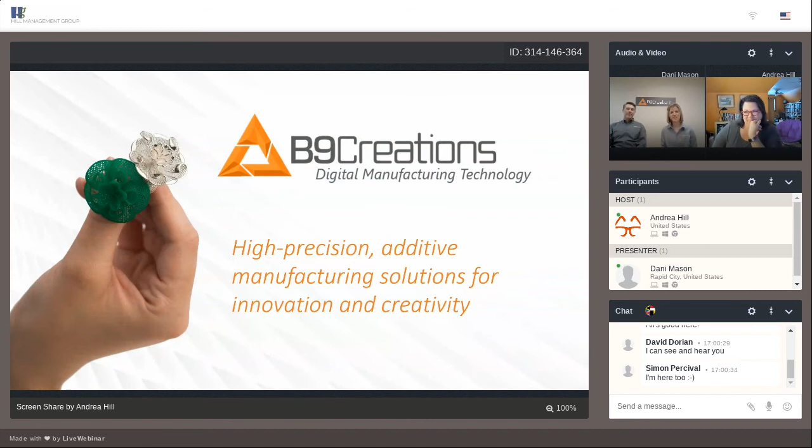So there we go. We'll keep this really short, but you heard something that's really important from both Dani and from me as we did our introductions. B9Creations is obviously not the largest company in the additive manufacturing space. We talk internally a ton about how are we going to make sure that we're serving our customers better than anyone else. And the phrase that we come back to over and over and over again is out listening the competition.

We don't have the marketing budget that some other firms have, but we do a tremendous amount of direct customer feedback. Everything from our materials to the new software platform that you're going to hear about, to the hardware. Some of that's in customer businesses, some of that's in our factory and through direct customer interactions with our engineering teams. But we really exist to improve our customers' lives with technology. And we'll talk more about what is the definition of improve and how do we do that as we go. But if you're trying to figure out, maybe you're not familiar with us, what is different or unique about our company, that's the heart of it.

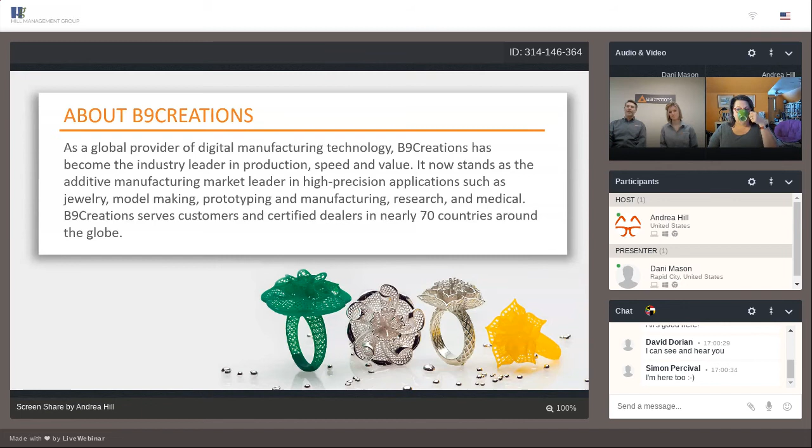So go ahead, Andrea. There's a bit of a lag here. I really am clicking when you tell me to. I believe you.

So part of what we want to discuss as jewelers adopt 3D printing technology is it's not just I have a machine in-house. There's an entire workflow that goes around their prototyping and manufacturing process, and that's where the solution needs to integrate into, both on the front end with design and on the back end to ensure that you get quality castings every time.

So I just wanted to lay out the framework, both in terms of here's what a digital manufacturing workflow looks like for jewelers, as well as where we've listened to that feedback and incorporated it directly into the products themselves. So if you look on this slide, you can see the first step is this consultation with your customers.

What we've found is that in a traditional business model, jewelers may bring a customer in, mock up a design, and then have them come back later in the week or the next week to validate that design, collect the money, and then proceed with the rest of the customer job. Additive turns that on its head.

So now when a customer comes in, say it's a fiance and they're trying to decide what their engagement ring wants to look like, you can sketch that and print an actual prototype in 12 minutes. So you're not having to send them away. You're able to use that as a same-day sales tool to be able to grow your business up front and then go back into the manufacturing process. So that's really where this begins.

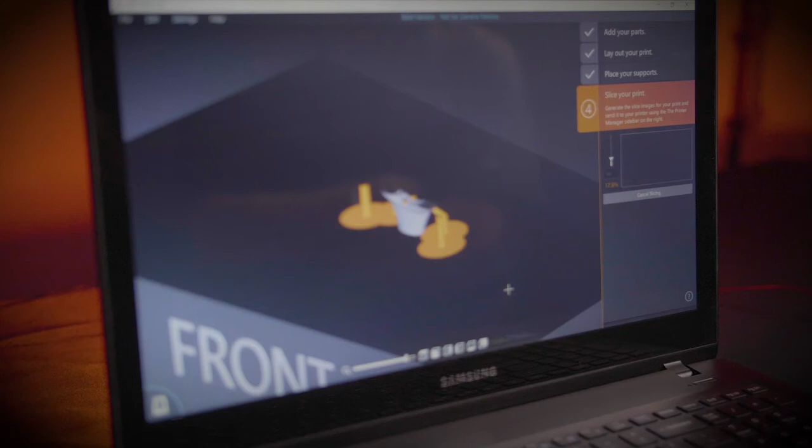surface finish, and painless post-processing. Backed by patent-pending technology that delivers pinpoint accuracy and even better surface finish, this software sets a new standard in state-of-the-art. Already in beta phase, this software will power new printers and offers an upgrade path for existing machines in the field, making them as cutting-edge as when they first came off the line. With a sleek new intuitive interface, users can leverage workflow mode that intelligently lays out, orients, and auto-supports parts in 4 easy steps, or drop into design mode to adjust a breadth of parameters to fine-tune results.

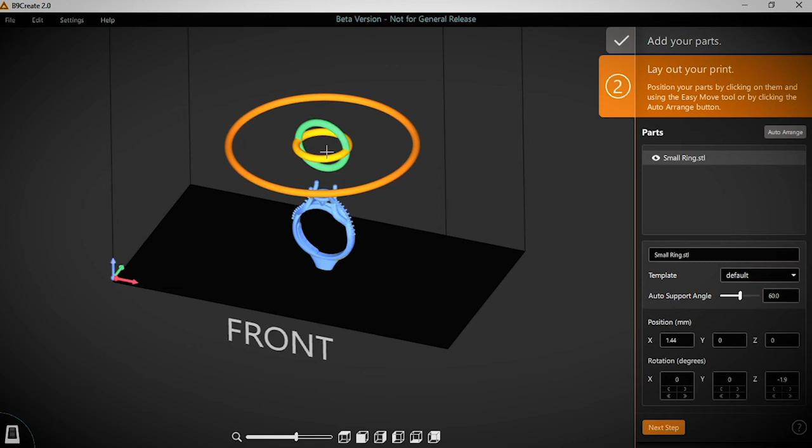Let's take a look at how to prepare your design in workflow mode. You can import, duplicate, and auto-arrange models in a grid format to maximize the print space available, or position models precisely with a movable sphere and tunable parameters. In this latest version, we're also opening up import capabilities to allow users to import and slice STLs and SLC files. Unsupported areas are now highlighted in a bright yellow, offering a visual indicator for more efficient supporting, as well as a helpful guide for jewelers new to 3D printing.

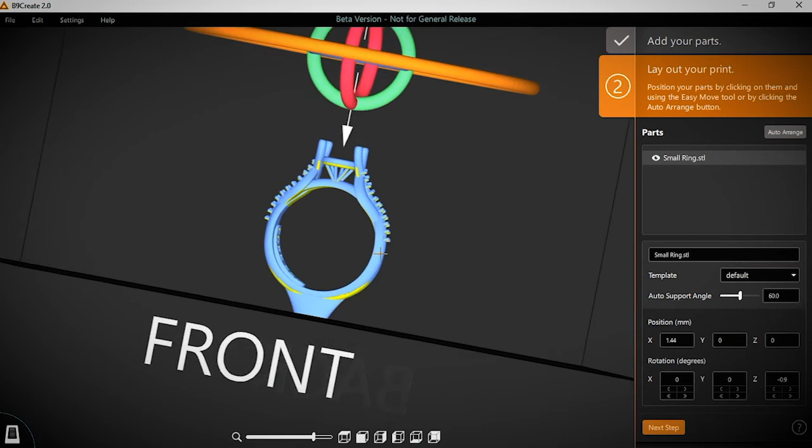Formulated with jewelers in mind, B9Create 2.0 also offers auto support templates based on the size and type of your jewelry model, from a small ring to a large bangle or pendant. In addition to offering default recommendations for a suggested support area, users also have a high level of adjustability based on your part's specific needs. New presets create custom silhouette foundations, minimizing resin usage while also allowing for user customization. You can see Cody placing supports on the model in those highlighted support areas, and now he's going to showcase one of our favorite new features.

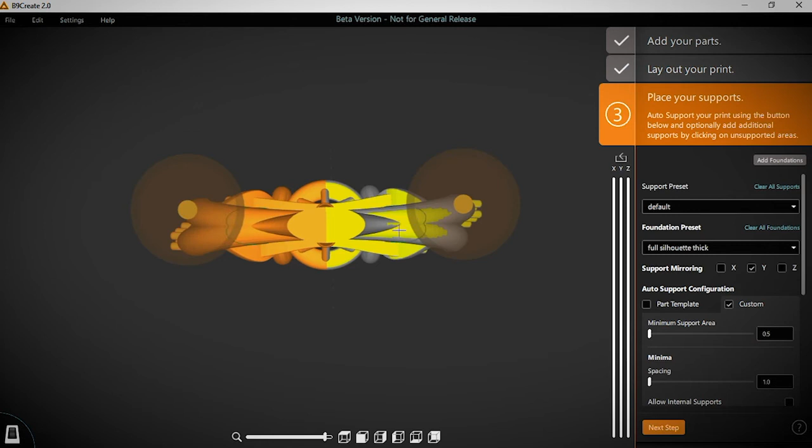Designed with feedback from real jewelers, B9Create 2.0 offers support mirroring to cut your work time in half. You can also add reinforcement bars for stronger structural supports, and lattice supports are in development as well. Plus, this support includes a sectioning tool that offers X-ray vision to enable you to view internal features of models as you're supporting.

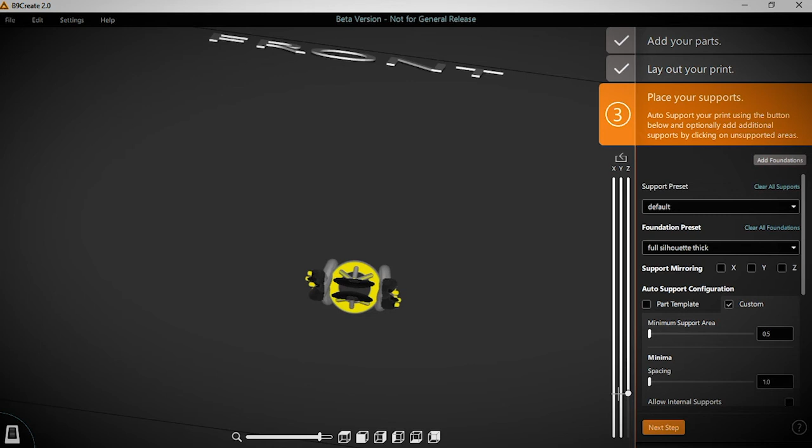Even after placing supports, you have a wide range of customizable options, from the tip to the base, and the ability to save your custom supports as a named preset for repeatable application every time. If you're leveraging auto support, you can either do so based on the templates you selected in the previous step, or use custom auto support parameters to fine-tune outcomes.

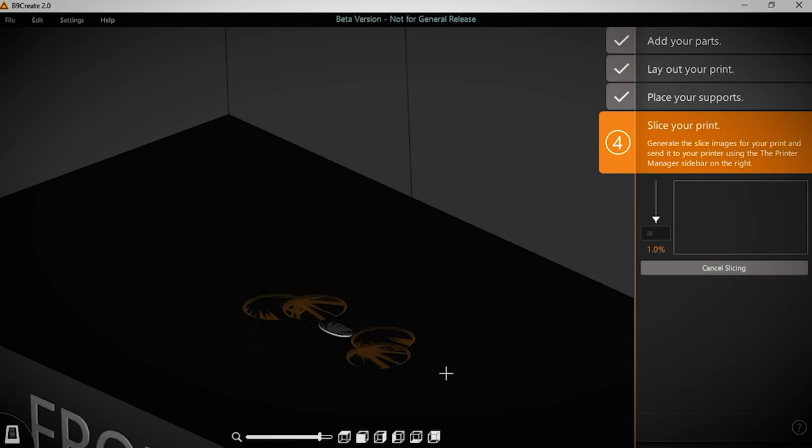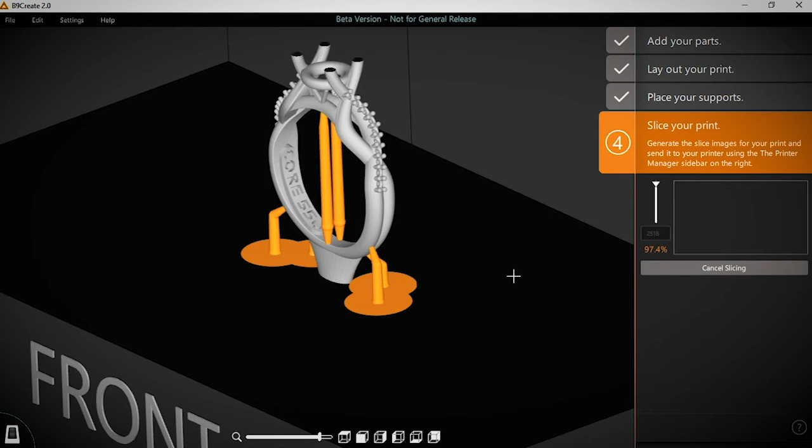After slicing, users can leverage Print Queue, an intuitive way to manage high production volume and optimize your workday, no matter how many models, machines, or team members are involved. B9Create 2.0 also offers robust reporting features with exportable data that allows you to track your print history, successes, failures, and see print volume estimates by model.

Designed specifically for scanning jewelry and small objects, the B9 Scan 350 can precisely capture each detail, cut, or facet of your most intricate designs in minutes. We understand for jewelers, time is money. The most intuitive 3D scanner for speed, accuracy, and simplicity can save you both.

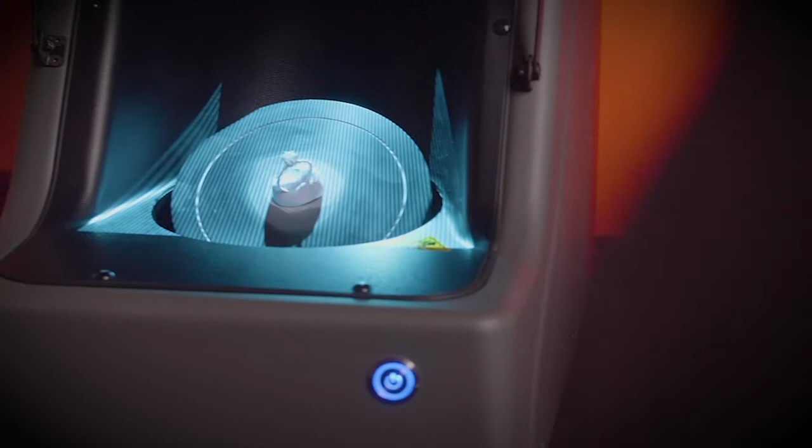The process is simple. Place your gemstone ring or other jewelry item in the machine, scan, and precisely capture each facet of the piece in minutes. With no external computer required, the scanner exports a precise replica that can either go direct to 3D printing or to your preferred CAD program for design.

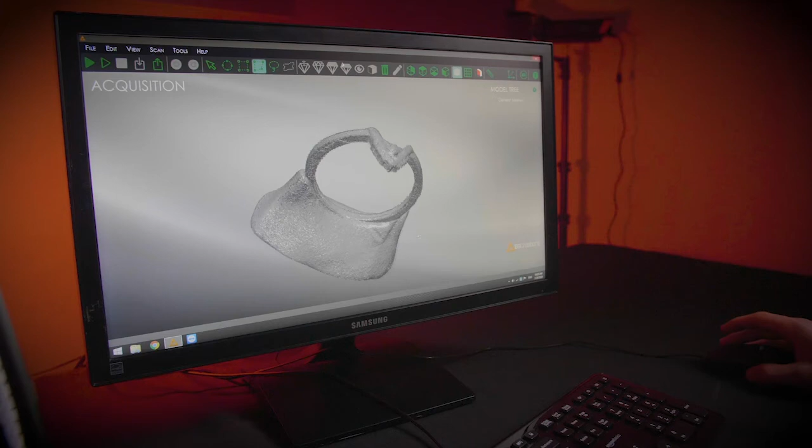Ideal for jewelers, the B9 Scan 350 allows you to scan any ring in under 5 minutes to make the perfect fitting shadow band, increasing efficiency as much as 45% while cutting down on error rate. Digitally capture and replicate heirloom jewelry or bracelet links, or complete hard-to-fabricate jewelry repairs by scanning the piece and designing the perfect fitting detail.

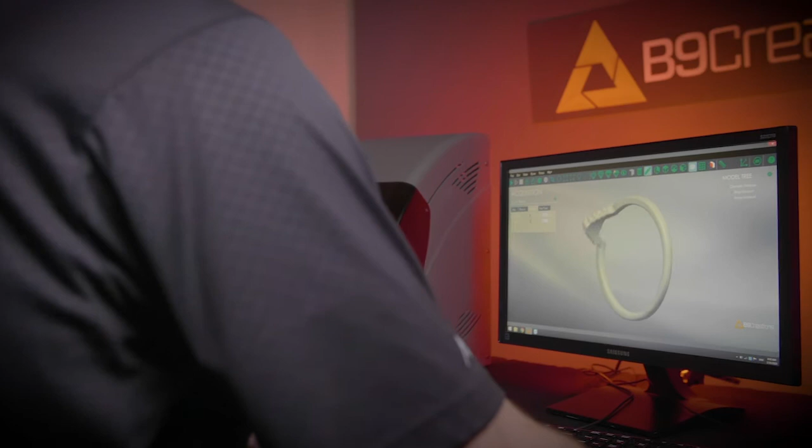For custom bezels and mountings, you can accurately scan even the most unique shaped gemstones to accommodate every angle, creating a uniform design while cutting down on design and prototyping time by 80% and ensuring a quality fit the first time. Integrate the end-to-end solution that enables your business to operate more efficiently and profitably than ever before, so you can focus less on process and more on proven results.

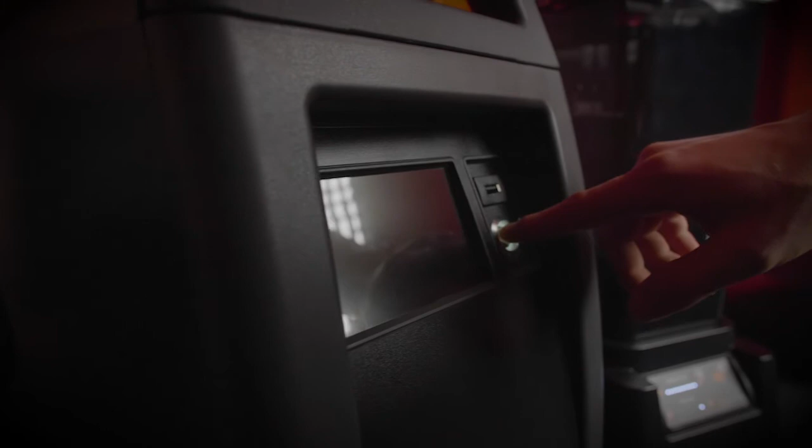Currently available in 2 configurations, 30 microns and 50 microns, with a new larger build platform with effective resolution finer than 25 microns, all our 3D printers are plug and play. Just 5 button pushes and you're printing.

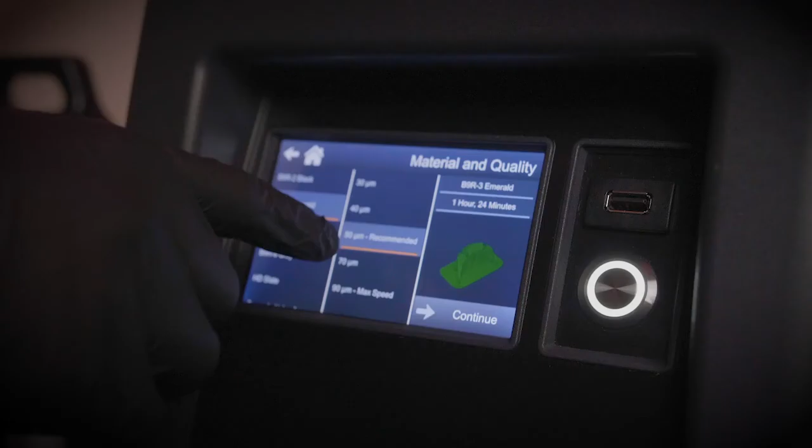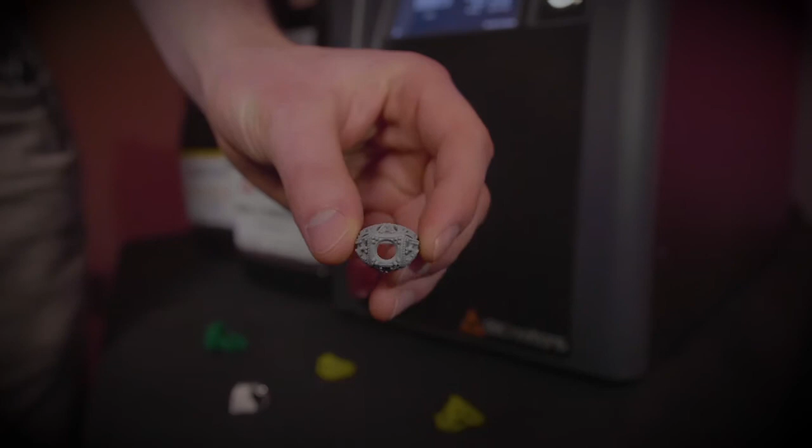After you transfer your files via USB, Wi-Fi, or Ethernet, customers can choose from a wide selection of castable and prototyping resins. Select our rapid prototyping resin for a build table of rings in 12 minutes, our high detail material to showcase delicate features such as fine filigree or pave, or our 2 castable resins for a clean burnout and repeatably flawless castings every time. Pour the resin into our patented DuraVat, which never clouds or wears.

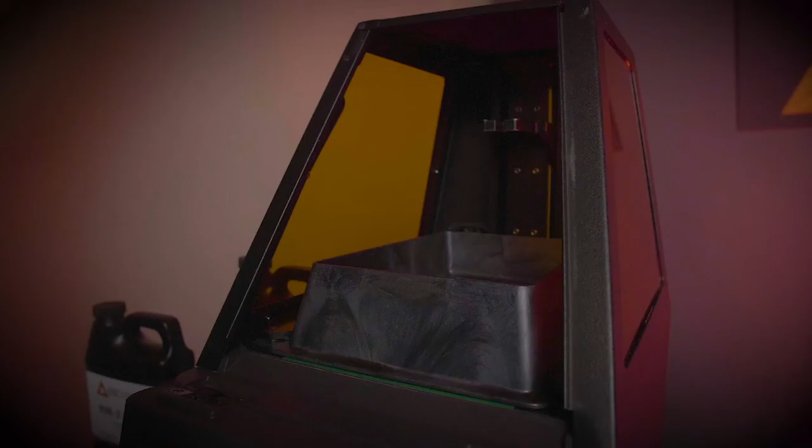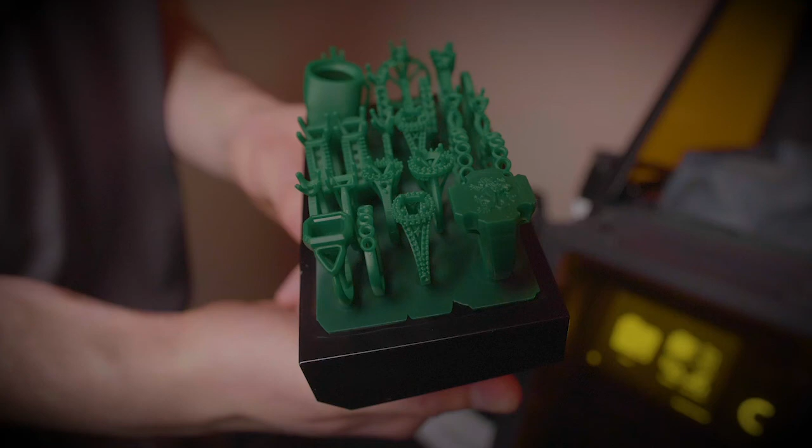Place the build table in the machine, then simply select your part in the print library, your resin of choice, and your slice thickness to optimize for resolution or speed. Hit print and watch your design come to life, with speeds that deliver a build table full of castable rings in 45 minutes. We know when it comes to custom jewelry, speed of delivery is paramount.

Whether it's the holiday season with a slate of rush jobs, or securing the sale up front with a physical prototype customers fall in love with on the spot, and a design you can cast that same day. All of our printers come with world-class factory startup assistance and lifetime support, free of service contracts or maintenance fees.

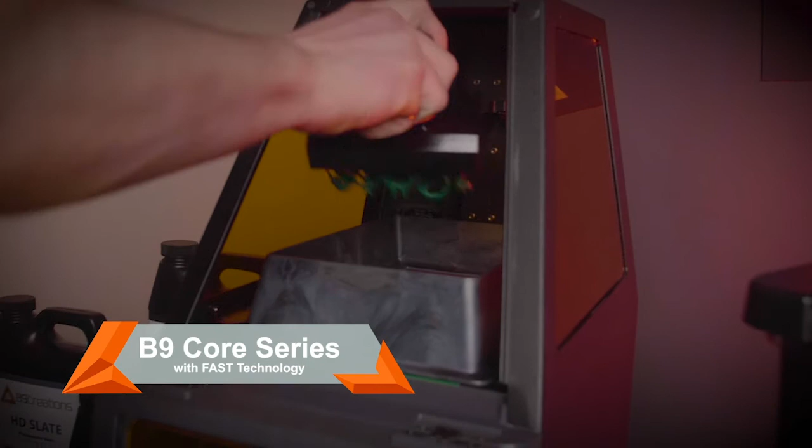So what does B9Create 2.0 software do for our Core Series 3D printers? In short, transform them. To understand how our patent-pending software technology makes our printers as state-of-the-art as when we first launched, it helps to understand how resolution, accuracy, precision, and surface finish come into play.

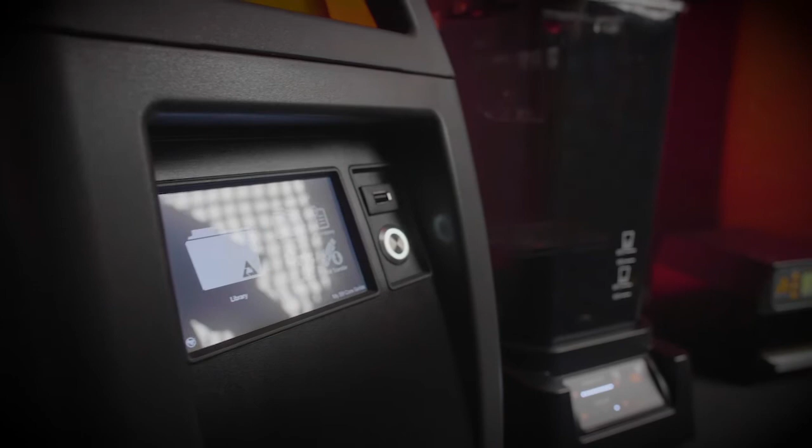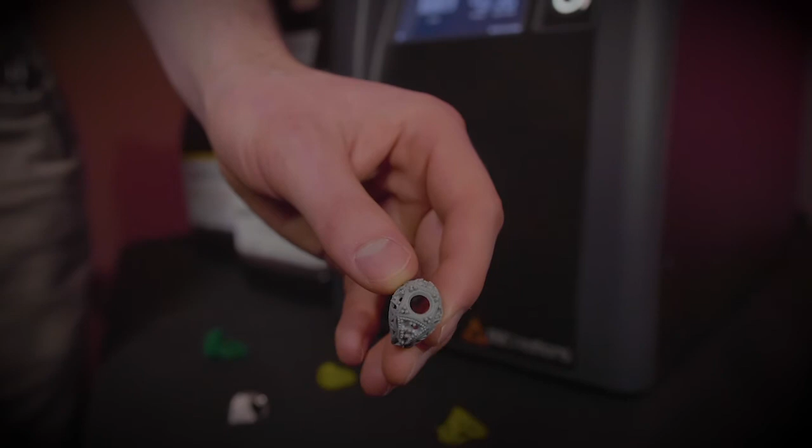Historically, if you wanted a resin printer that delivered high resolution and phenomenal surface finish, the accuracy of your part, or how close your 3D printed part is to your CAD file, suffers, because smoothing the edges of your print affects dimensional accuracy. With our patent-pending technology, users no longer have to choose, and in fact, get to upgrade. You benefit from an even better surface finish and pinpoint accuracy, with absolute fidelity to your CAD model.

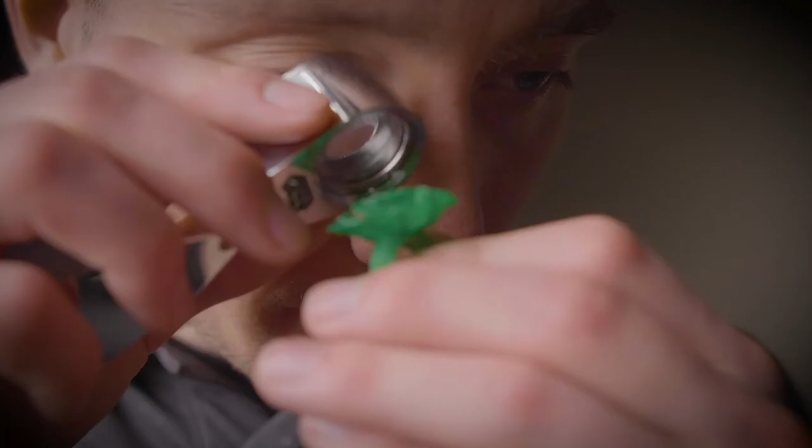This means you get perfectly sized prongs, seamless fit settings, and even the finest filigree or feature set comes out flawlessly every time, all with a smooth finish that cuts down on post-processing and polishing. Plus, you still benefit from the B9 Core Series precision, reliably producing the same output every time. High resolution, pinpoint accuracy, precision, and flawless finish bundled into your B9 Core Series, whether you purchased tomorrow or 2 years ago.

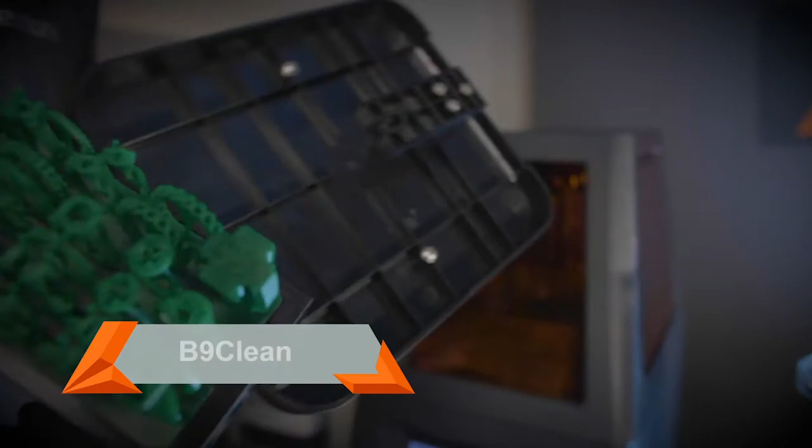Your push-button operation shouldn't stop at the printer. Automate your post-processing with thorough no-mess cleaning on the B9 Clean. After printing, parts can be transferred directly from the B9 Core Series 3D printers to the B9 Clean, while still on the build platform or as loose models on the part tray. The B9 Clean offers customizable cleaning cycles, uses 75% less cleaning solution than other wash units, while still enabling 50 uses before changing the isopropyl alcohol.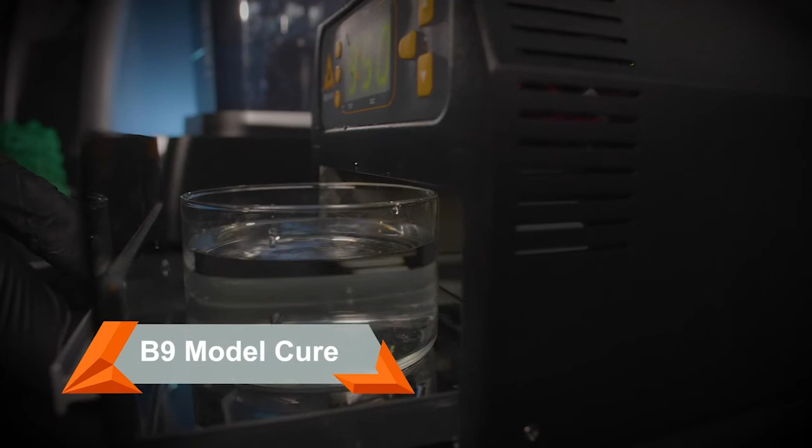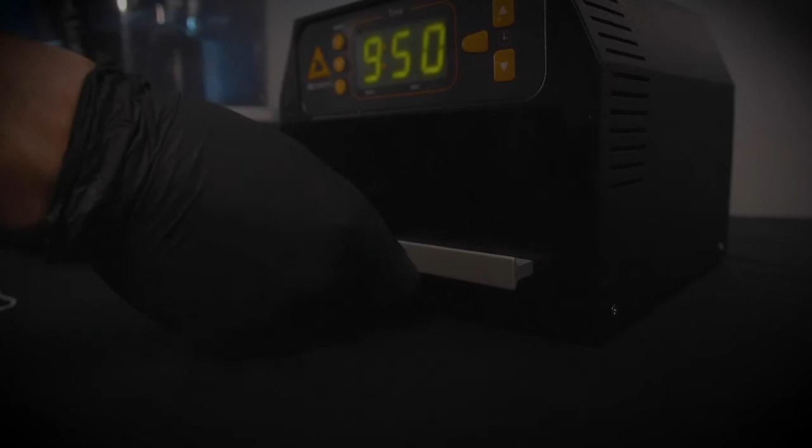After cleaning, cure your parts in minutes in the B9 Model Cure before taking them to casting or to customers to try on and close same-day sales or verify the design. For a jeweler, that means from printing to cleaning to post-curing, you would have a whole set of castable rings in an hour.

We also have new developments coming in our 3D printer platform with the launch of our B9 Core 5 Series XL. Designed to retain all the speed, resolution, and ease of use of our current 3D printer line, the B9 Core 5 Series XL offers a digital manufacturing solution that enables you to take advantage of a larger build platform without sacrificing high precision. Designed with a build volume that is 2 times larger than the B9 Core 550 and 5 times larger than the B9 Core 530, you get all the advantages of larger production with an effective resolution finer than 25 microns, enabling perfect fit settings and perfectly sized prongs every time.

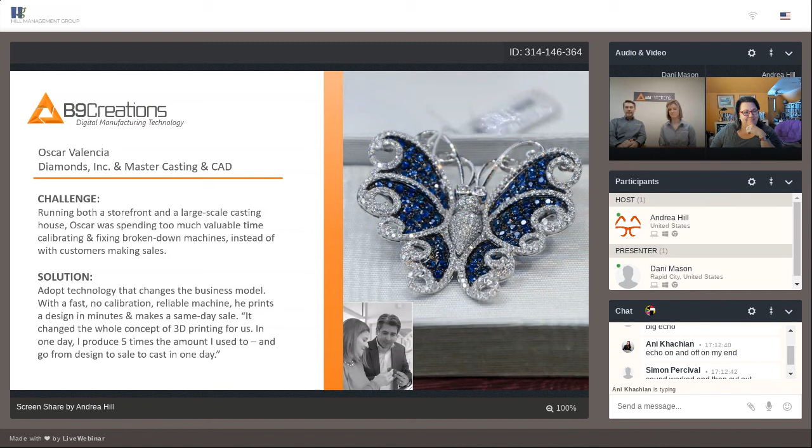And one of the last, if you want to call it categories, we wanted to talk through is a company called Riddle's Jewelry. They are similar to Oscar in that they have both retail stores and manufacturing hubs, but it has to scale across quite a number of stores. They have 6 hubs in different locations and then 60 retail stores across that geography as well. But just like Megan, just like Oscar, just like a lot of you, there's an increasing demand for custom and they needed a solution that addressed this.

But when Shon says we have to make sure that the workflow works for you, that includes integrating with your design software, understanding if you want to take a design center approach and reform your retail stores, we have to be a seamless part of that process. It can't be a specialized, separate technology that doesn't integrate with where you're trying to take your business.

So Riddle's came to us and they had this idea to transform their retail shops into in-house design centers where customers can come in, whether they bring an odd-shaped gemstone that they want an engagement ring designed around, or they want a piece of jewelry designed from scratch, and they want to be able to take those customers, do the design, print the prototype, make that same-day sale, have a material durable enough they can try it on and confirm that's what they want, and not just do that one time in one store, but every day across 60 stores. So when you think about all of those time sinks and learning curves and you multiply that times 60, it becomes a really big deal.

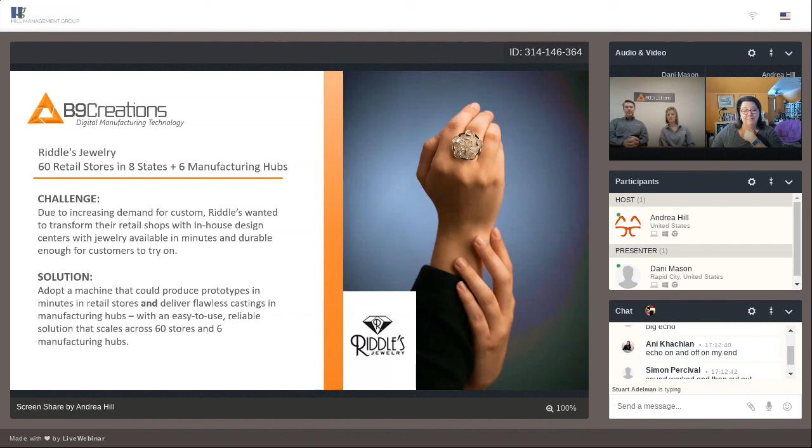This might be a good point. I don't know if we have other questions pop up, or based on those different categories we described, if folks have particular questions about how they would adopt 3D printing or when to upgrade. I just want to pause. We have some other things we can talk about, questions we get frequently, but I want to give the attendees a chance to ask any questions on their mind as well. You do have a couple more questions.

Okay, one from Simon is, will the B9 Clean be adaptable for the new XL prints? Yes, that's a great question. And yes, when we say that we're going to stay true to that workflow solution that we offer, that carries right on through with the XL. So you'll be able to continue having automated cleaning of your parts with that new printer platform as well.

Stuart Adelman has several questions. One is, do you have a material that casts without changing his regular wax casting process? So I have to be a little careful, because when you say without changing my regular wax casting process, I don't know exactly what all you mean by that. Everything from how you mix the investment to burnout, there's a lot of variables in that equation. I will tell you that our casting resins come with a recommended burnout schedule.

Actually, one of the things I've enjoyed about this business is jewelers and engineers are a lot alike. If you want to convince an engineer of anything, you better have another engineer explain it to him. If you want to convince a jeweler of anything, you better have another jeweler explain it to him, which is one of the reasons why customer feedback is such a key part of what we do.